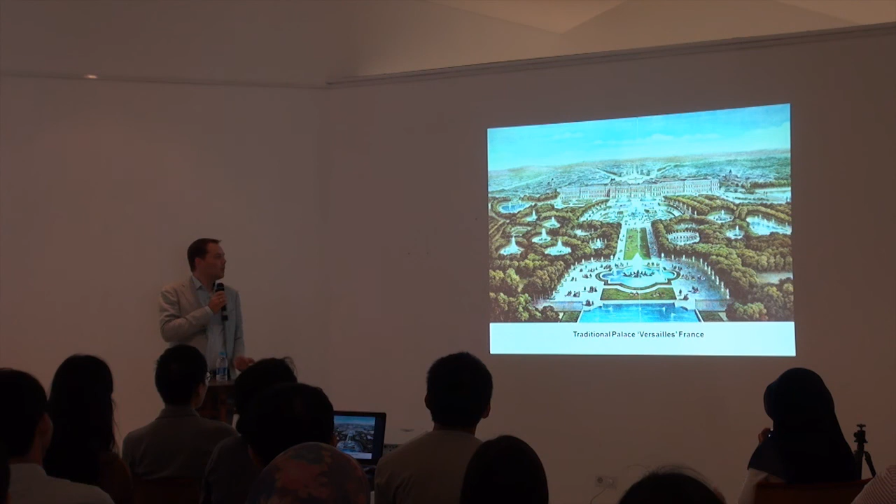This is a very typical way of representing horizontal building by a palace, which always was a very stretched building, and therefore became more or less an icon of the monarchy or of the king, and has a lot of stature.

But also within Indonesia, your traditional houses in Java were also always very horizontal. Functionality was next to each other instead of stacked. And even until the early 1900s, we were still talking about typologies that were mainly oriented horizontally, like Frank Lloyd Wright's prairie houses that you probably all know. There was no pressure on this typology of buildings simply because there was space enough.

When verticality became an issue was when space became scarce, and how do you deal with that scarceness? That's also a question now that Jakarta is facing. You were able to stretch yourself for a very long time, but that's over now. You're stuck in the areas surrounding you, and now you need to think about how to make a city that is much more vertical compared to horizontal. So from horizontality, you're talking about verticality.

A dream of a lot of people started with the Tower of Babel going up to heaven. But there are many reasons why people always liked to be challenged to look upwards or vertical.

But it only became possible to really think about it with the invention of the elevator, an elevator that could bring people to real heights. That was only done in 1852 by a guy called Otis, still one of the most famous elevator brands. This is a real key moment, because from this moment on, people could really start thinking about verticality in a totally different way, because transport was not only in the horizontal plane anymore, but became vertical.

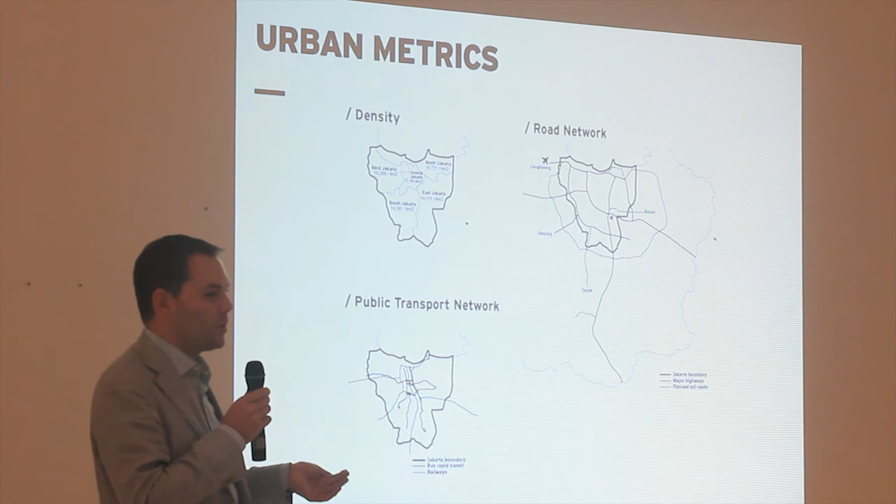Also your transport network is important to consider for vertical development. I don't tell you a secret that most people in the world think that the transport system in Jakarta is a nightmare - it's one of the most congested cities in the world. Because of that you could think about concentration, but you could also think about vertical planning as a starting point for developing new transport systems between vertical points in the city.

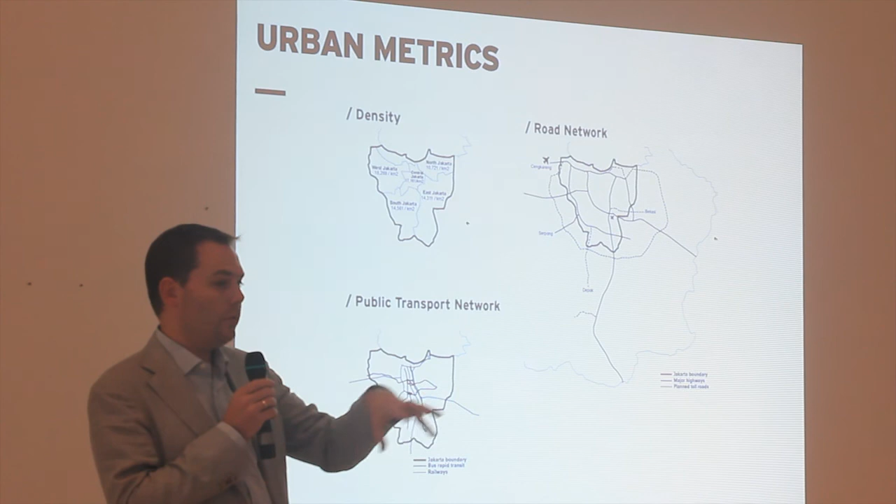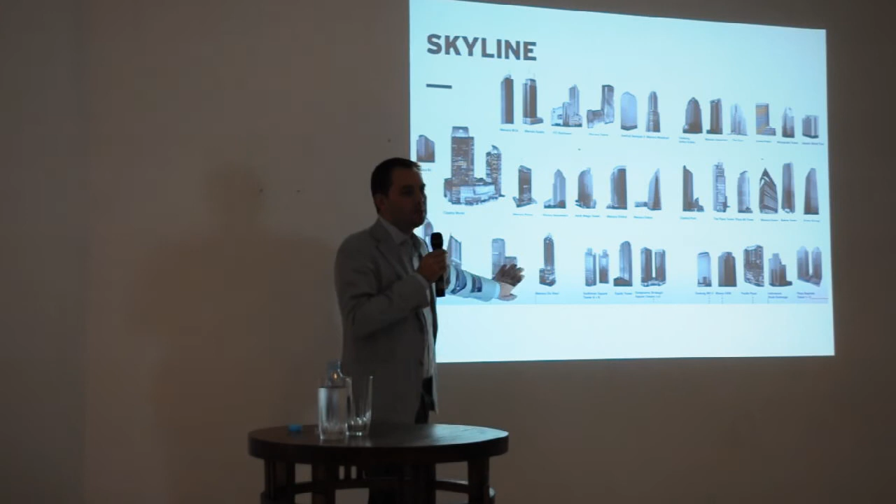This is what is currently happening in your skyline - or you could question, is this a skyline? Because it seems to be very unified, very similar. How do you deal with that similarity, and how can verticality add a dimension of differentiation? Currently it's maybe not the case. It would be interesting to think about that as well.

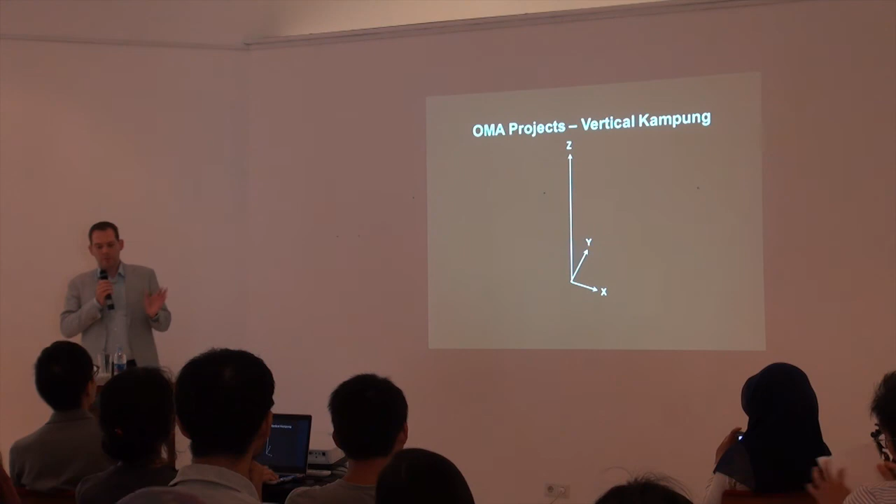So this is kind of the introduction to sketch a little bit the topic and to give a little bit of my perspective on it for the masterclass. Then I will show you some of our work, and then I will come back in the end with some of our work in Indonesia to illustrate how we work ourselves with that context a little bit.

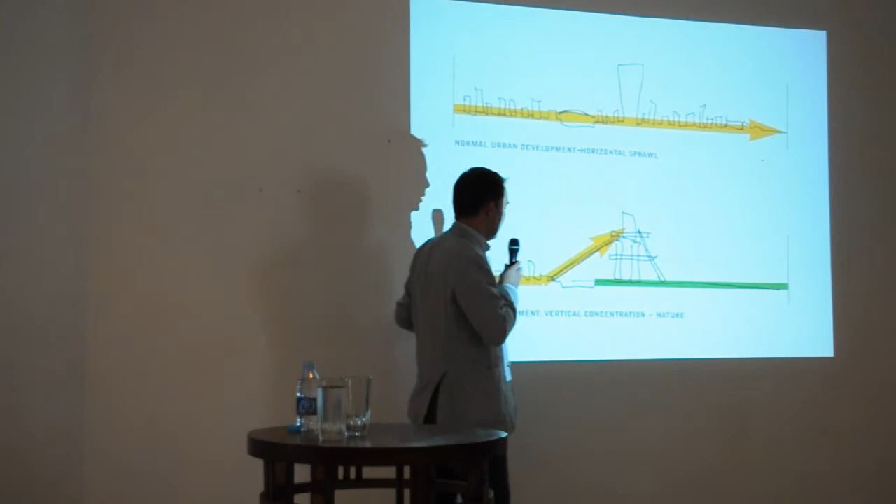The idea was to not develop horizontal sprawl, but to bring the horizontal sprawl up to liberate the ground plane for green space and to create a city at height, a very concentrated city.

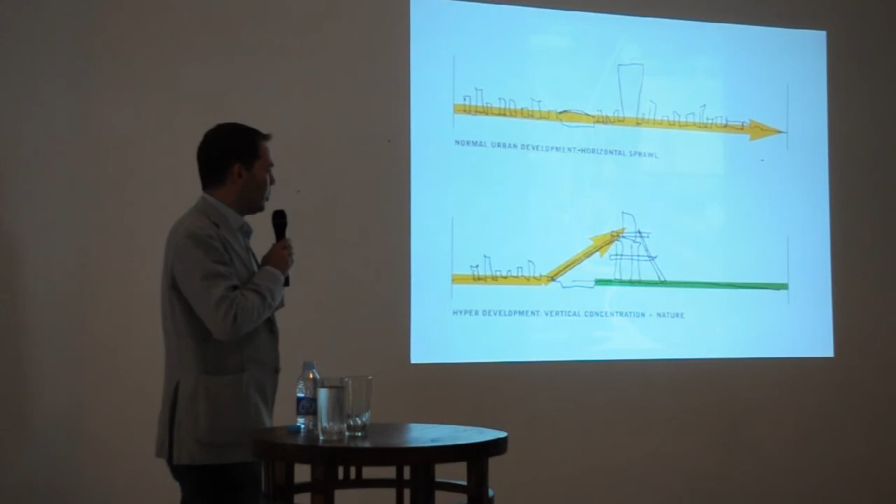Why Bangkok? Bangkok is a city that has a lot of problems in its transport system, but also has almost no public green or any ground plane that can be used by the people of the city anymore.

Which meant that we could liberate space. Normally these 120,000 people would use this ground plane. If we go for a structure like this, it would only take that square footprint, and that meant the rest could be public space or nature.

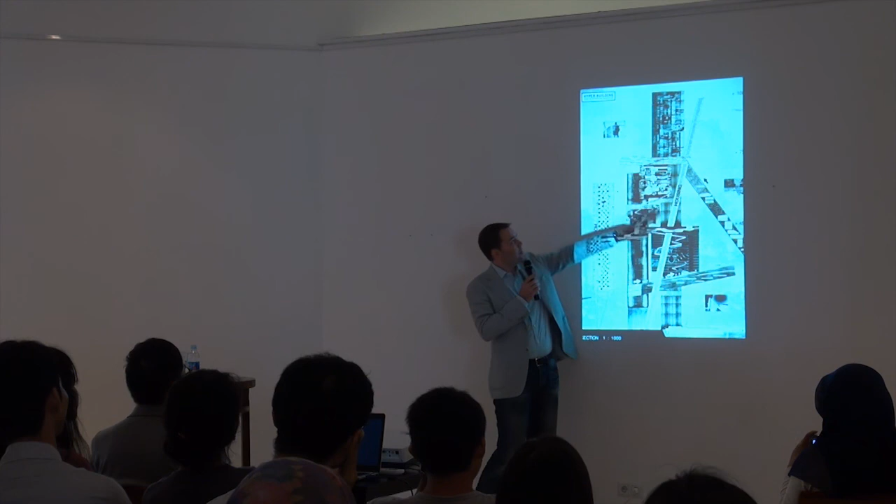These were the hand drawings made, where you see housing implemented also as streets, as vertical transport nodes, and all the cultural, media, universities, and shopping integrated in a vertical dimension. Here you see there was a main route that people could take through it.

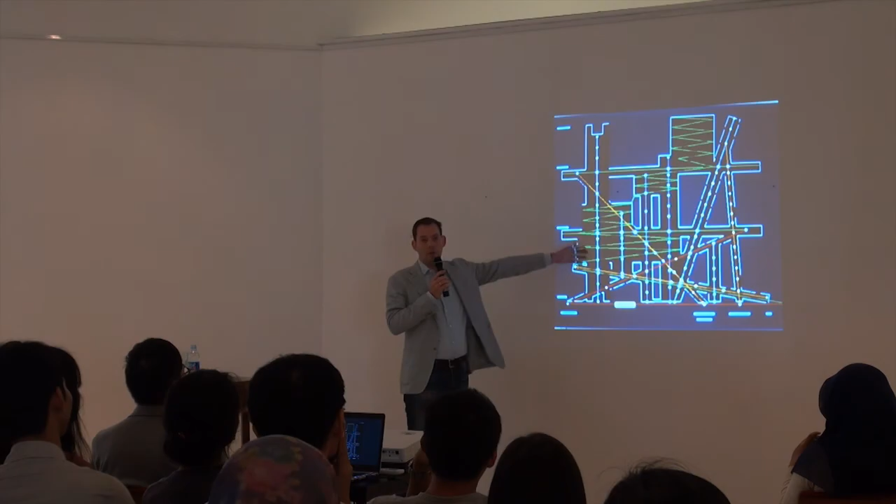All the connections were in different dimensions and different directions. Here you see that elements we know as mainly horizontal in this project were projected as vertical. So simply a street became a vertical element of transport, and the houses were still connected to it as if it was in the flat plane.

Of course, the people in Bangkok thought that OMA became totally crazy. How could you propose something like this? Because of course that doesn't really work. So it became a theoretical model to start a conversation on vertical planning in cities.

Similar proposals we did later on in Shanghai and in New York, based on the same project and the same system, just to provoke a dialogue about vertical planning. It's not just an extrusion tower, but it can be much more. It's a social aspect, a social planning of a part of a city.

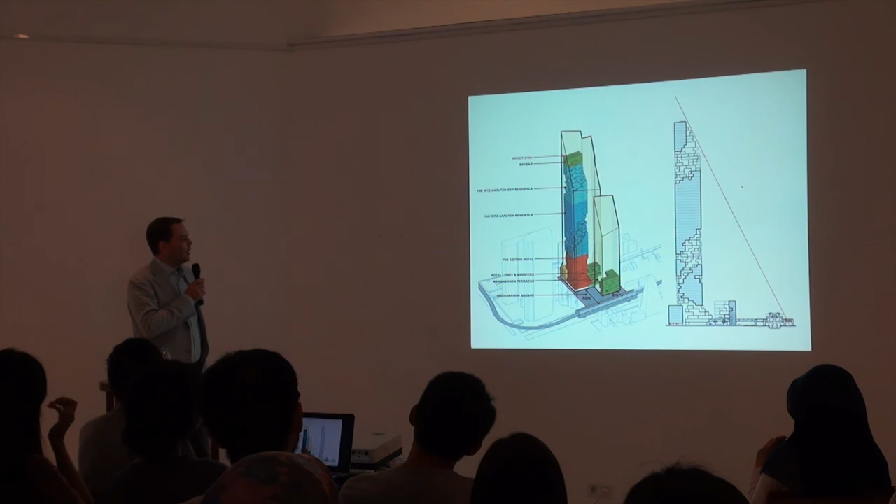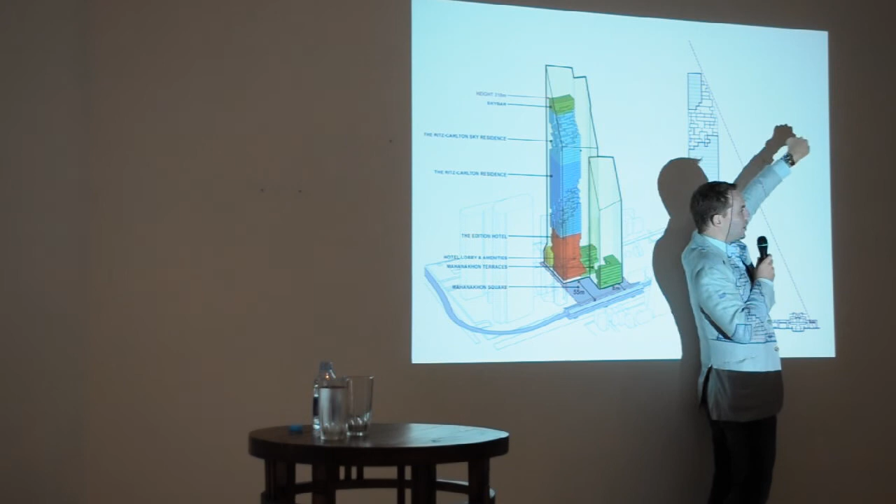They asked us to do retail, hotel, apartments, and then on the top, luxury apartments. What we did, we simply took the envelope we were given, and at the top it is cut off because of the planes that land at the airport and come through here, so you cannot surpass that line. We just cut it off, and then used the program bar we received simply as the planning.

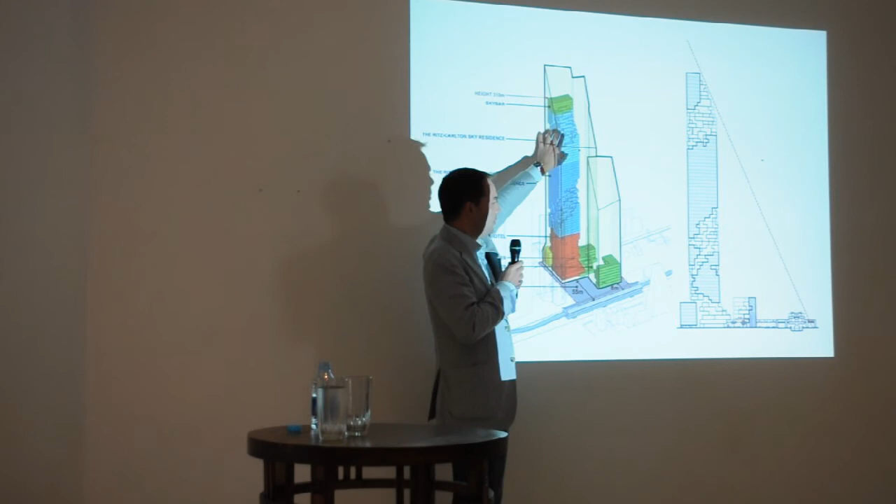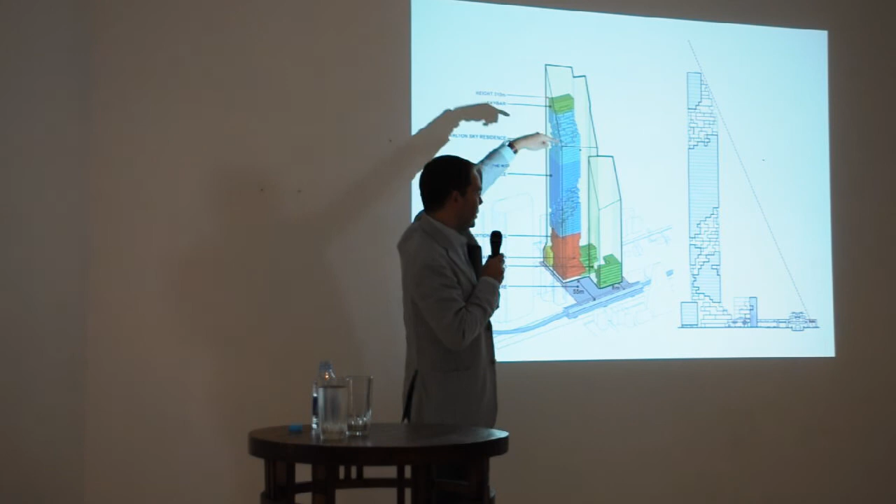So you really have the retail, really have the hotel, really have the apartments, really have the sky apartments. And because for us, everybody that uses this building is individual, we started carving out a spiral so that every floor plate becomes unique and different, and every element of the tower becomes unique and different. You see here how it works.

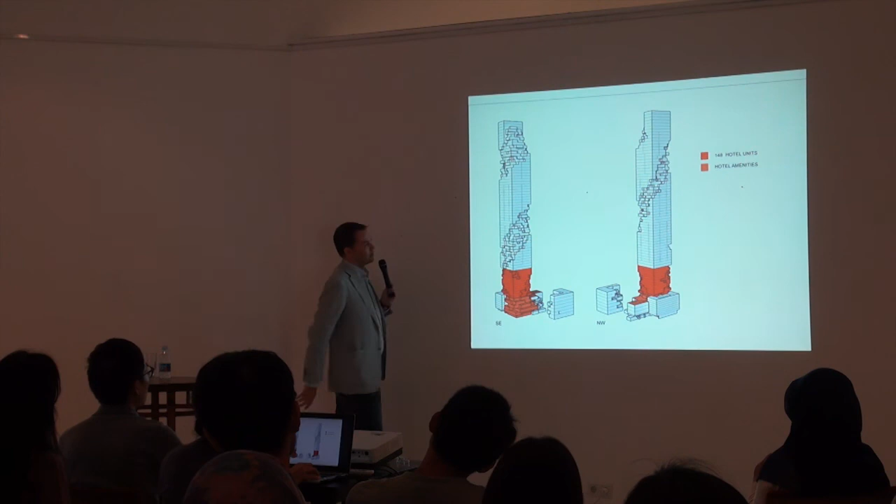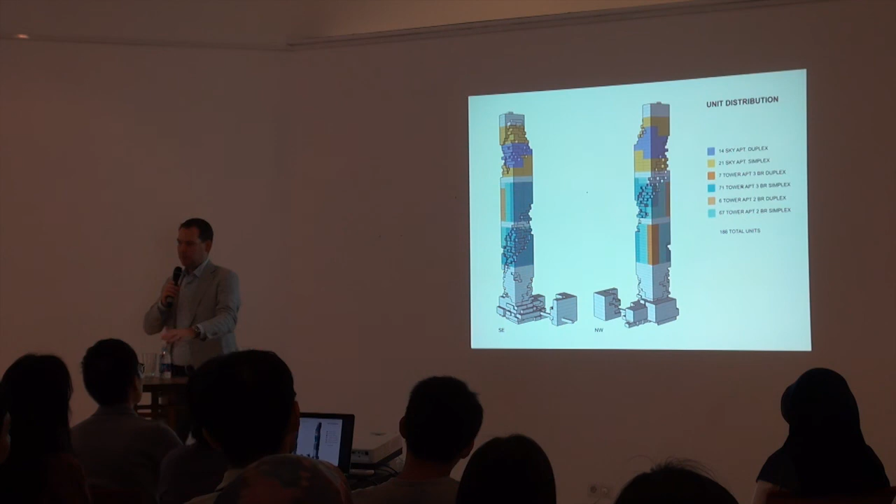This spiral just continues over the tower to make every place different over the planning. Here the hotel units, and here all the housing apartments that have outdoor spaces in different places—single apartments, duplex apartments, and triple apartments.

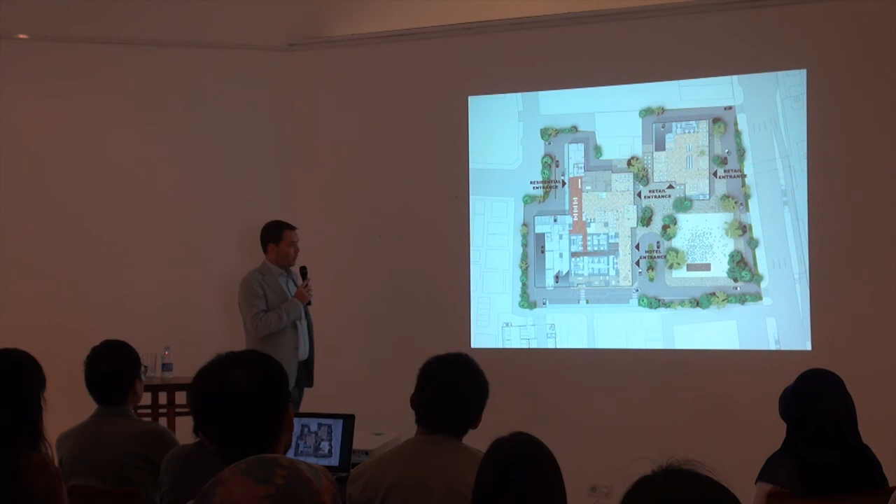Next one. And then here you see how it looks from below, from the retail area, and coming up, and you see that all the houses have their own individual way of expressing themselves, going to the top. This is in one of the apartments.

Because we go so high, the windows cannot open anymore in a normal situation because of the air pressure, so the windows simply open up to the top. And here you see an image of the building, how it will be when it's finished.

Then a project that we are building currently, and I will also show you pictures of how the situation is simply in our own city, in Rotterdam in the Netherlands. The building is also called the Rotterdam, so it resembles the city, and it is really a vertical city as well. It's right in the heart of the city, on one of the most prominent islands.

Of course, Rotterdam is known for its harbor activity, so there's a lot of water. And this is the picture of the site when we were asked to design it. This is Hotel New York.

That's a very famous place in the Netherlands because that's where all the big ocean liners would start their journey to America. So people that went to the promised land from Europe got on the ocean liner through Hotel New York and then went on their way to New York. It's now a monument, it's really a hotel now.

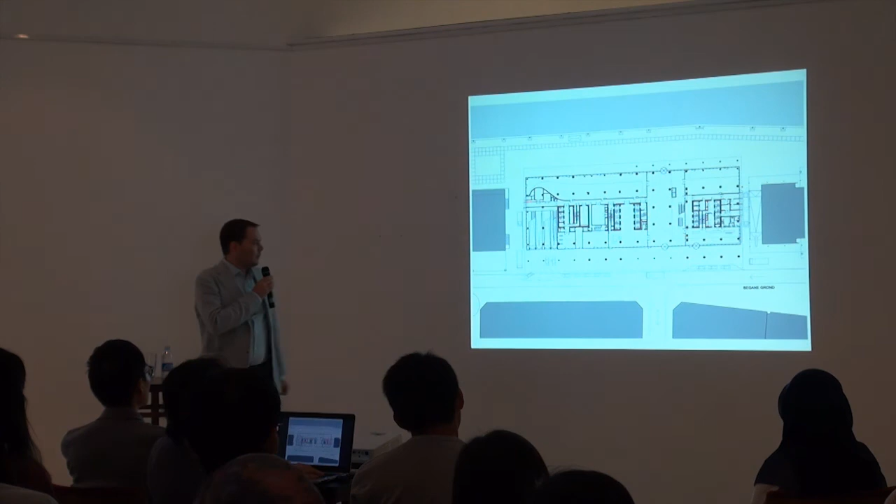And here you see at ground layout, again, different emphasis for the different functionalities. And then coming up, still united with their cores. And then they start differentiating themselves, creating the views from the apartments, creating the views from the offices in the vertical dimension. And then on the top, separated.

This was the submission for the competition. Here a render of the situation. And here the night render that we submitted at the competition moment.

And these are pictures I took two weeks ago. We were there for a partner meeting. And you see now how the building is coming up. So this is one of the old industrial buildings, and the building is now towering above it.

Inside of the units, you see always sea and water. And here you see the outside of the building with the different boxes shifted in such a way to create that vertical dimension. And this is on the top floor, the view over the Maas. And this is from below, where you see the differentiation of functionality also expressed in the volume.

Then maybe the most literal example that OMA ever did about vertical planning of a city is the Renaissance in Dubai.

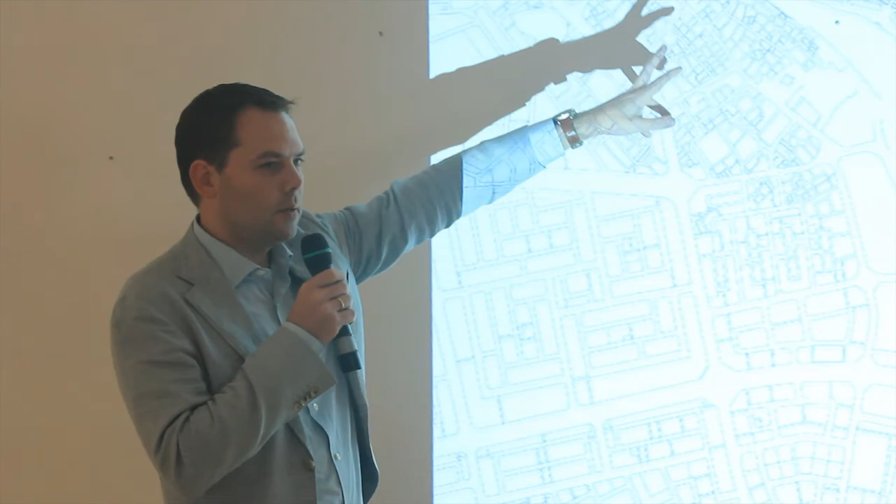What they were planning to do was demolish the old city of Dubai, which was a beautiful old Kasbah typology of city, and replace it with all kinds of towers. Luckily, they made this a preservation area, so that didn't happen. So we proposed to simply take a piece of that old city, which is horizontal, and make it vertical.

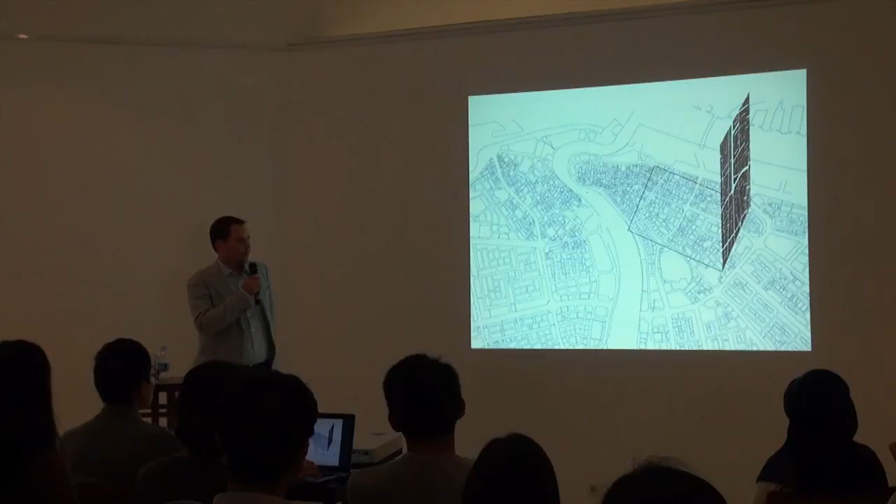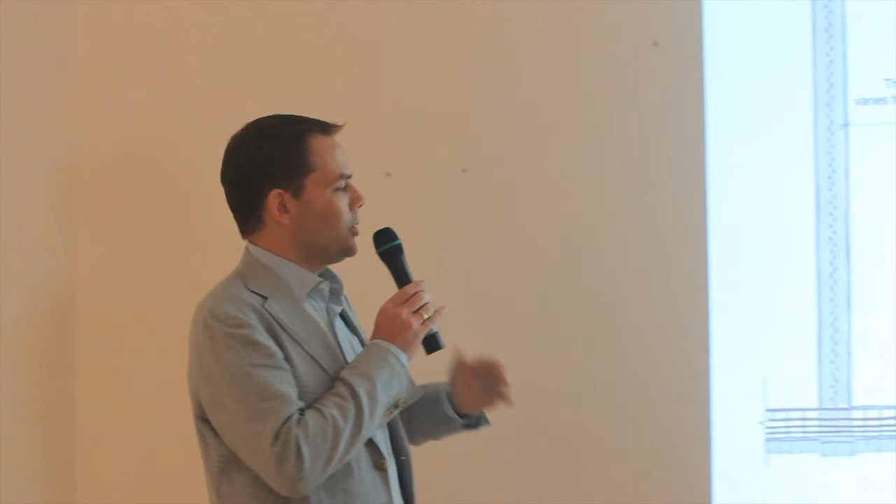So this was the section of the horizontal city, and then this was the vertical planning of it, simply using the exact same spaces, the streets in between, the streets in the vertical dimension, and then the blocks with the different functionalities. And then this was the architecture put to it, which was very generic, and at the same time a few special moments where the cultural functions were in the slab. We also worked this dream out so that the structure was defined and possible.

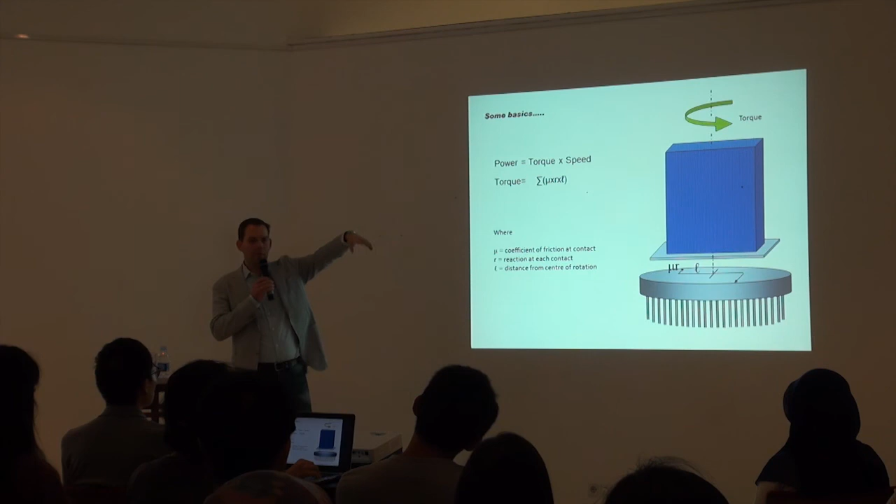We also thought it might be interesting to see if we could put this slab in the ground in such a way that it could rotate 24 hours around its own axis, so that the view from every angle of the city would change within 24 hours. So this was the idea - all these towers that they had planned, and we said, don't plan more office towers, keep a piece of the city as a central focal point, and build it as a very generic slab. And then it could turn in 24 hours around its axis.

And then this would be the end image that we presented as the vertical city in Dubai. We also had a dream that whenever Earth was not existing anymore, and people or whatever other creatures came back to Earth to discover what we did before, they would find that thing as a preservation.

And can you go back one?

What's very important to say is that this was a dream, of course, but we were very close to realizing it, because the plan was in the end selected, and we planned it out all the way to detailed design, and then the crash in Dubai happened. The only thing that didn't survive was the turning, but the whole project itself was really detailed down to detailed design, so it was almost starting construction. We still hope that Dubai revives and that maybe this building can still come back.

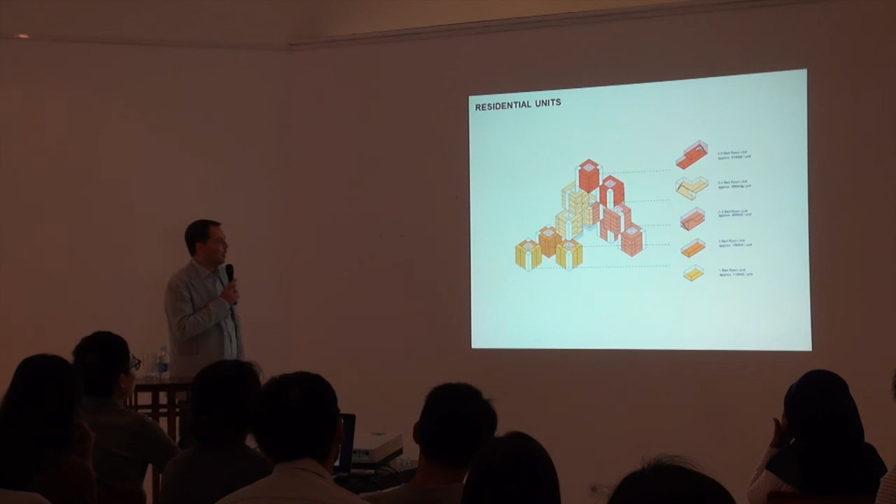And here some of the residential units - we're talking about the Kampung residential program. Here you could see that we organized the cores in the corners in such a way that it would stack up and become one unity.

Here you see all the different typologies of residential units, and all the different types of connections between these units. And again, a picture of the model.

That project was in the end not selected, but it led to this: Gillman Heights project in Singapore, which is now almost finished. Probably some of you that visit Singapore from Jakarta have seen it come up.

It's in a very important site location within Singapore. But the discussion was how can we make a scheme that also incorporates nature in such a very dense city as Singapore. Also, how could we make a community and not just a building with individuals? And also, how could we learn from some space experience in nature within our building?

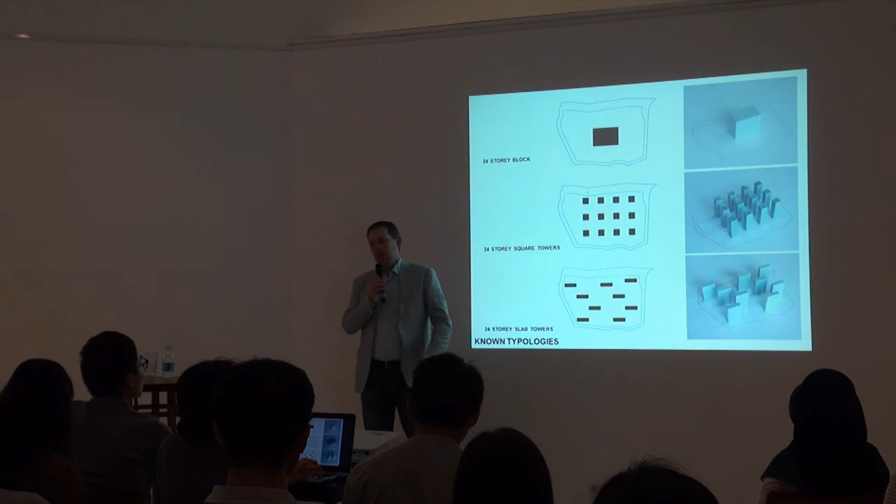The site is 81,000 square meters. We have an FAR of 2.1, so we can build about 170,000 square meters on that site. The typical response would be you make one big building, or smaller towers, or smaller slabs. But all of that is quite problematic because of the interference. So what can we learn, also in a large project, from a village?

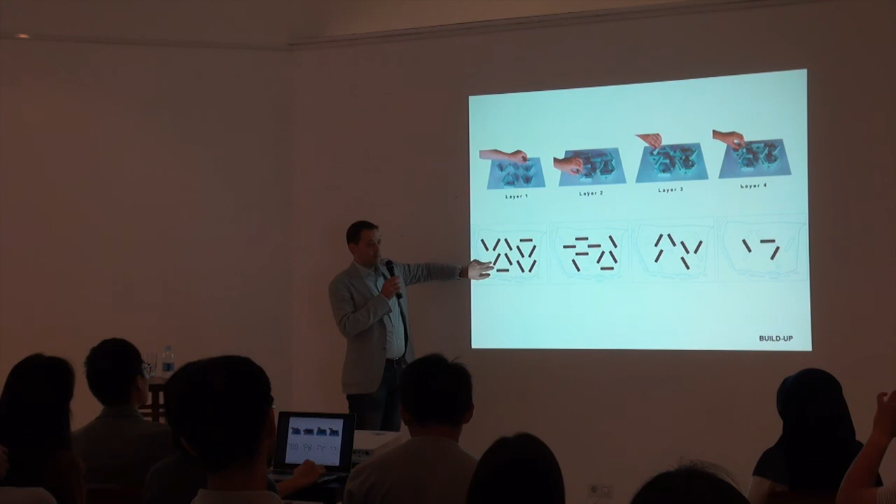And then we started to create different layers in a vertical situation. First, more dense, and all these areas have a direct relationship with the ground, so their main relationship is close by - views further away are less important. Then coming up in lower density, so in the end the highest layer of blocks has the lowest density and has mainly the view out.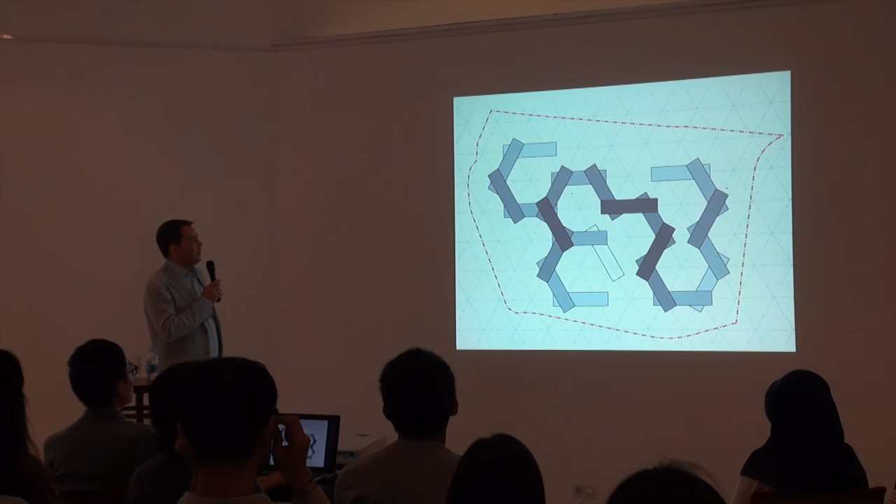And then we created a grid of these blocks that always overlapped at 2 points, and that's exactly always the point where the core is. So this core, which sometimes connects to the top layer, can actually serve 4 blocks on 4 different layers of the project, and therefore it became very efficient for vertical transport.

And then this is the stack of the blocks that you have, all with communities within that are planned in a different way. And then here a closer look.

And here the image that we submitted at the time of the competition, with a very generic facade, but a lot of views over, a lot of parks at height, and the blocks all directed in such a way that they always had a clear view out.

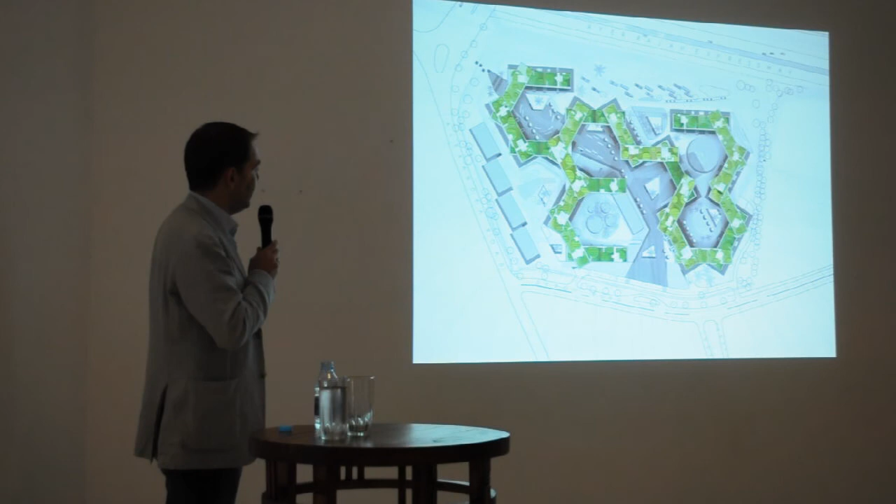And here the image of the roofscape and the communityscape. And here an image from close by on how these apartments would work. Here a view out from the balconies, and here a flat facade.

I unfortunately cannot show you images of the building project at this moment of time, because the developer wants to launch this project to the worldwide press with one group of pictures when they are ready to do so. So by contract I cannot show you anything else than drawings.

But the building is now fully at height. The facades are close to up the 3rd layer, and they are now finalizing the facades of the 4th layer. The interior of the 1st and 2nd layer is finished, and the first inhabitants should move in November of this year.

Then maybe the most extreme version of a vertical city that OMA ever planned - it was for Mumbai, the city of Mumbai in India, where we didn't only explore vertical functionality, but also vertical public space, and even the biggest square of India to be at height, at almost 300 meters up in the air.

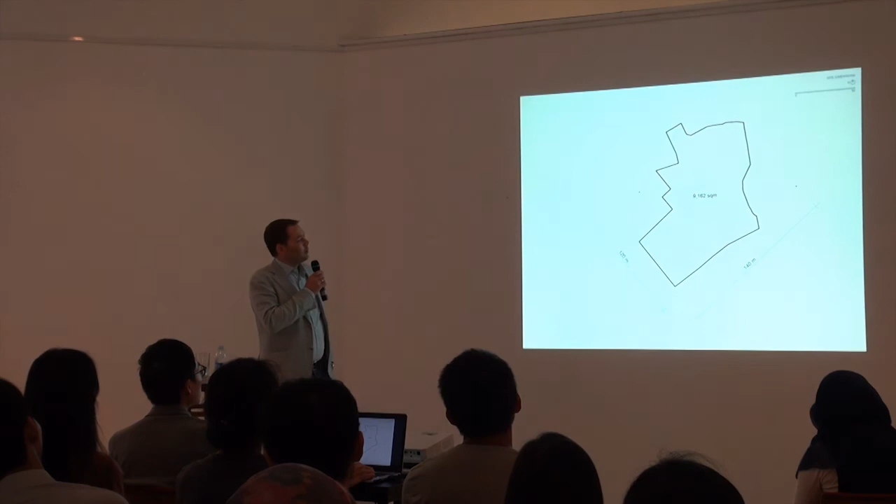This is Mumbai as it is today, with some very historical buildings like the Victorian Palace, and some very quick vertical buildings coming up because of the pressure on the city. The India Tower that we were supposed to plan was right in the heart of the city - a very tiny site, really very small, only 9,000 square meters.

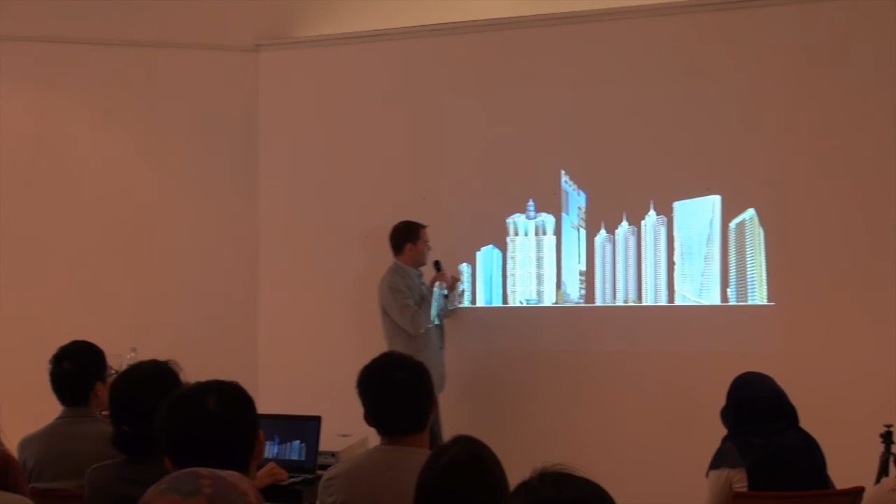We were asked to do 3 towers on this existing 9,000 square meter site. So the question was, can you please do 3 towers on it? And this is the program: luxury apartments, lease apartments, guest apartments, food and beverage, retail, hotel, parking—really a city.

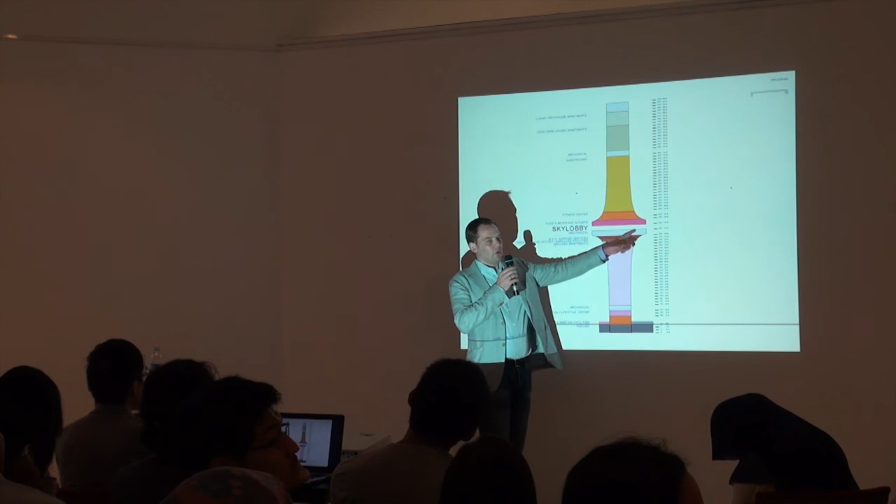We said, let's do it not in 3 towers, let's do just one very, very tall one, and create a place in the city which is a Sky Lobby—simply a plaza at height. We created a site mainly dominated by housing, and a top side with the other functionalities. Because of that, we created much more space surrounding the tower and much more public space below. And then this was the image that we submitted.

We won this competition. Unfortunately, the developer that was going to build this building wasn't playing by the rules and ended up in jail. So the building is never going to be built, to our great frustration.

All the floor plans of the building, so from very small coming up to the center where it became the plaza, and then going back to very small at the top again.

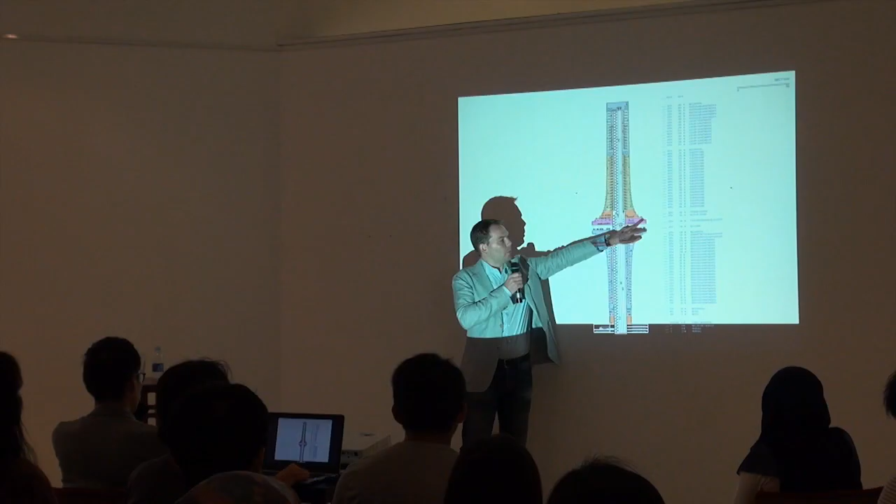And this was then the vertical organization: lifts going up in the same shaft because they would transfer, then the public functionalities with retail, the plaza, and all the F&B facilities around the heart, all the housing at the bottom, and the hotel and top housing at the top. Here you see how that would look if you were at street level.

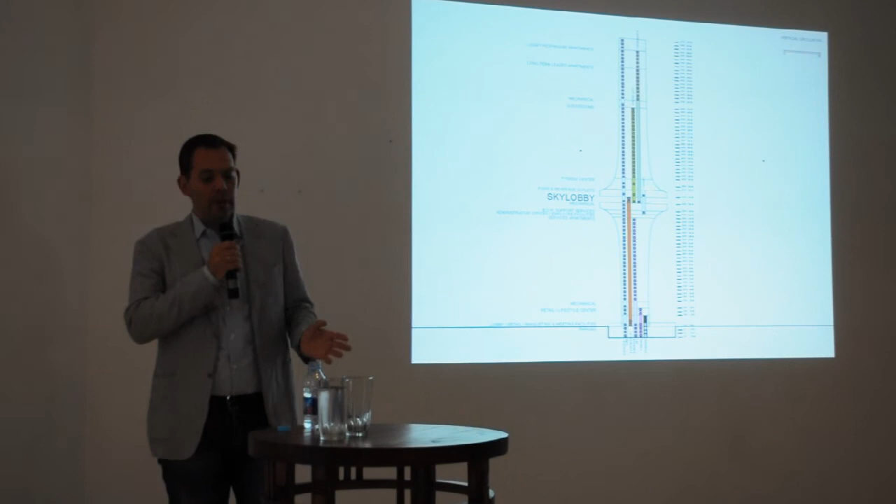The vertical transportation is of course extremely important to pay a lot of attention to. When you would arrive, the footprint would really be very small.

And then you have the lobby with retail and then all the apartments. The apartments would all be very much the same—you had the central core and then apartments in different sizes, but always with the view out and no connection to the neighbor, so you would never look into the next building. And this would then be the view over Mumbai from your apartment.

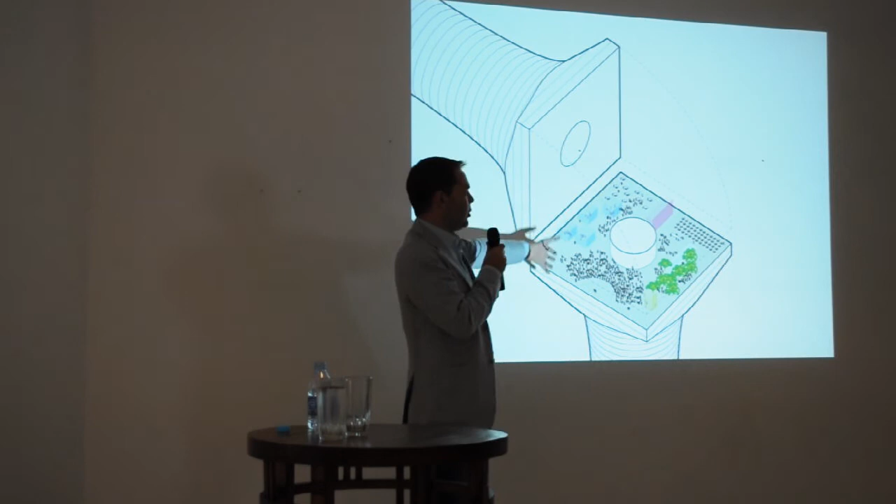Then the center area, as I already said, an open plaza at height with all the retail and F&B facilities surrounding it—almost like a public square inside the building. And here a view when you approach it.

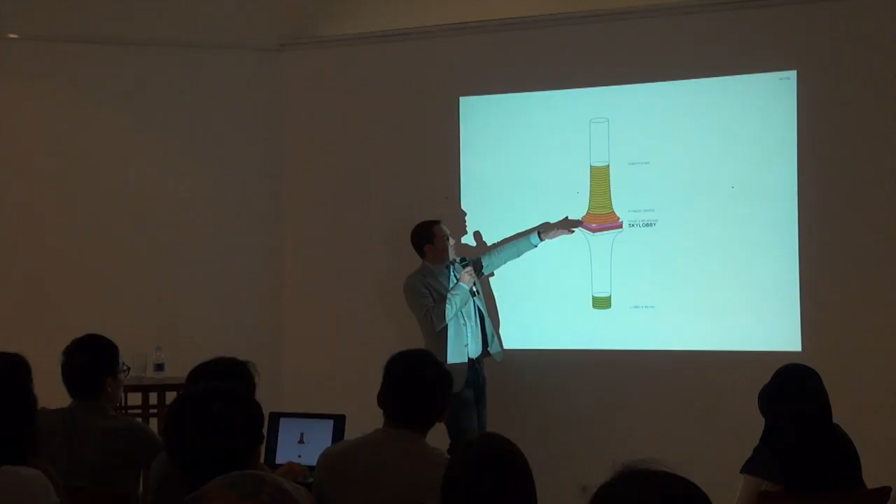And then above it, the supporting functionalities and the hotel. The hotel had standard suites, the small rooms, and then, of course, the larger suites, again overlooking the city. And then at the top, the luxury apartments and the penthouses, which could sometimes take even a full floor.

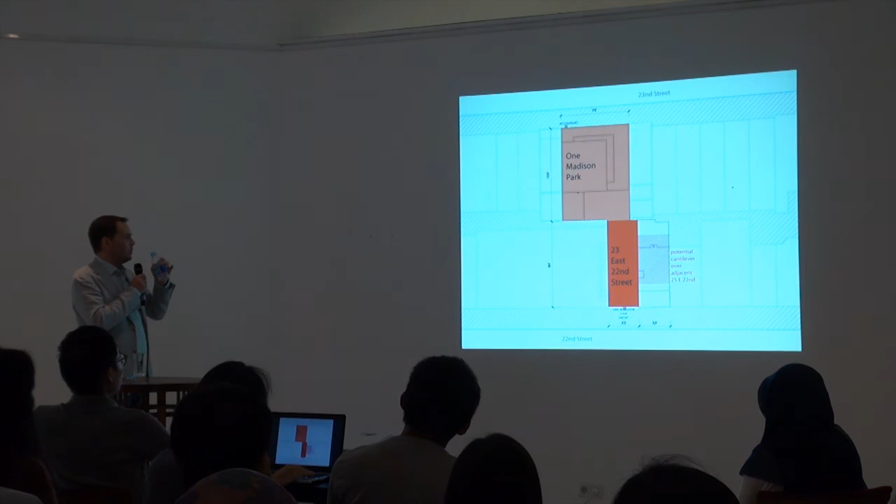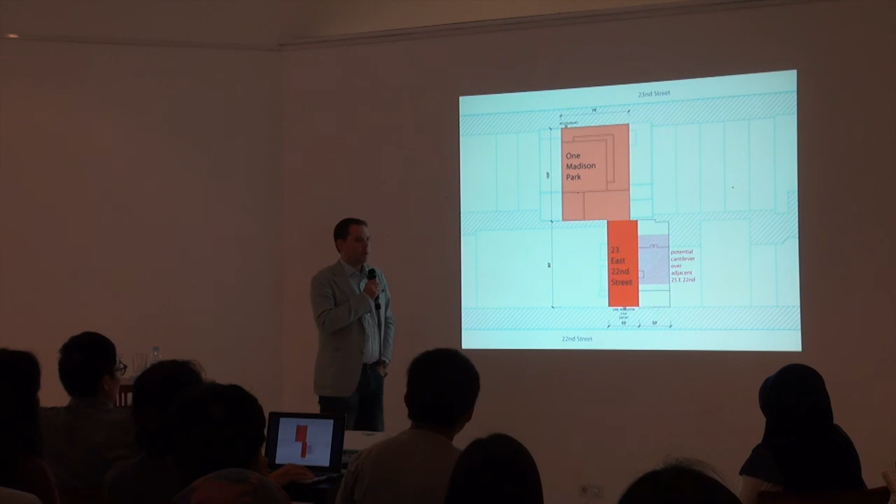Then a project in New York, 22nd Street. A project that started building already, but then through the economic crisis in the United States got stopped. We still hope that when it goes up, it comes back. It is a very small site.

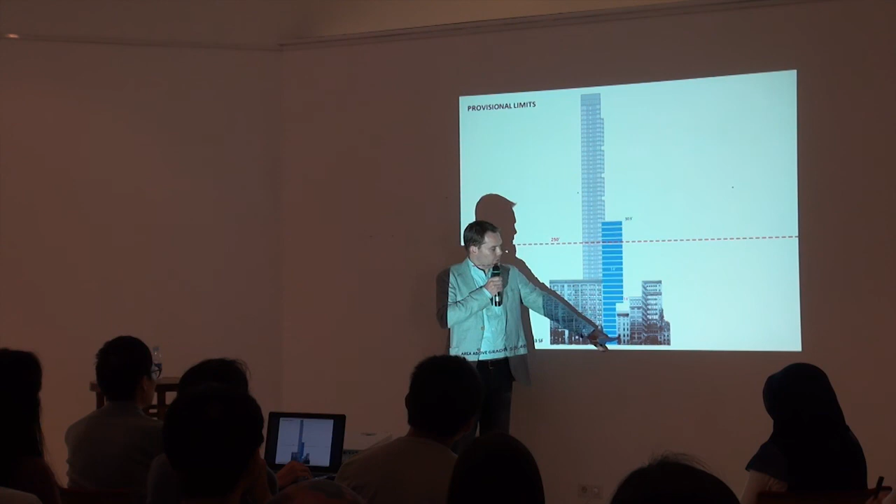Next one: in between 2 buildings, only 33 feet wide. We could go above the historical building, gain air rights, and build above it. It would have the Madison Tower in its full view, but because this is Madison Park, which is extremely important, we wanted to create good views to that park, also from our tower, although it was blocked by this one.

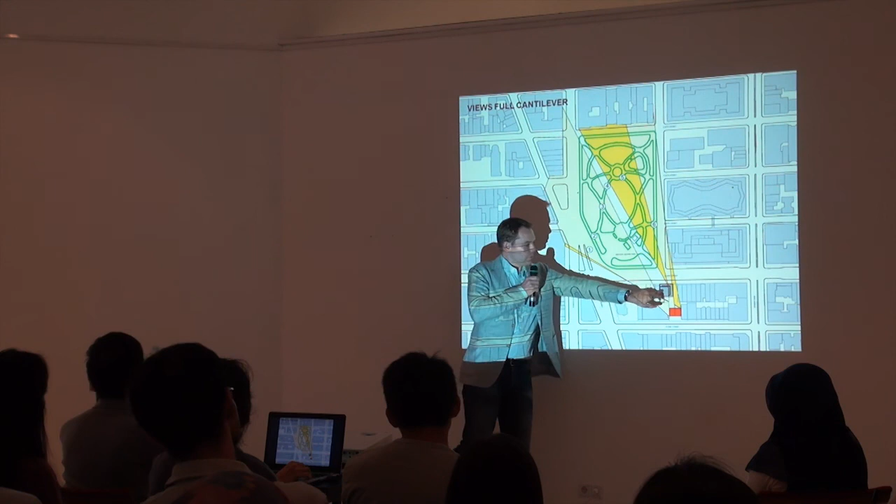So the first apartments were very long and not with a lot of width, and then the apartments coming up became wider and less deep, and then in the end, they were in their full width.

And then again, a project. This was already on sale, the sales units was built, and then this happened. So unfortunately, we predicted with our own building the failure of it. And we still hope from a different angle that at a certain moment this happens again and the building will be realized.

Another example in New York, but then opposite, not on Manhattan, but with a strong connection to Manhattan. Here on 111 Street, where the connection with Manhattan and the different important projects that are currently realized is clear. The site is a full block.

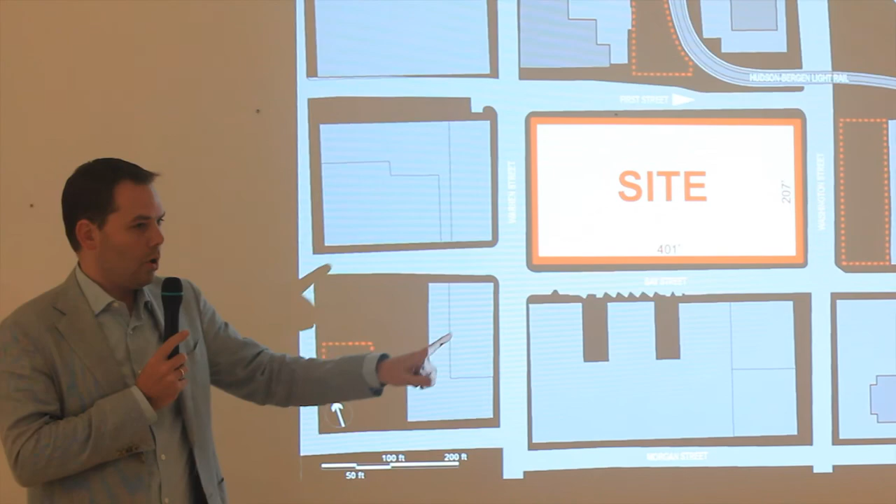This was the master plan that we received, what we should do. Then this was the program of that: retail lobbies, gallery, parking, artist studios, hotel, and apartments.

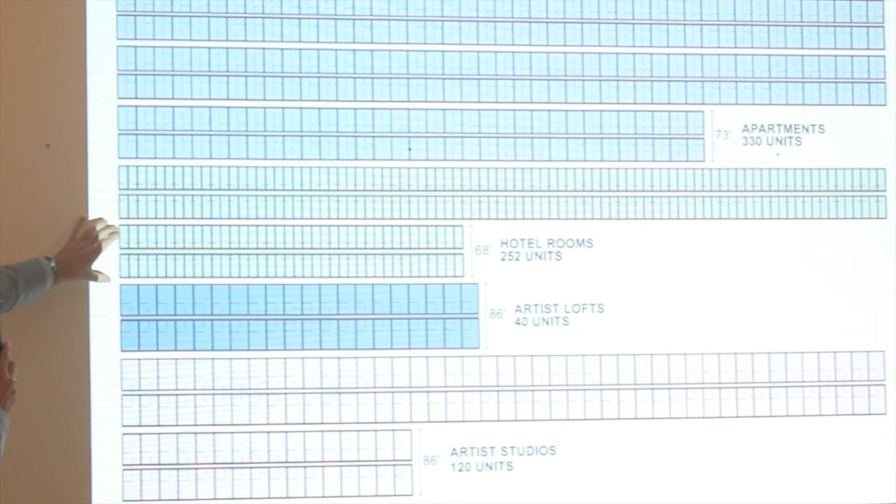And again, we started with a very mathematical approach. We started laying out these different spaces and their requirements. We actually figured out that all would fit in 73, 68, and 86 feet.

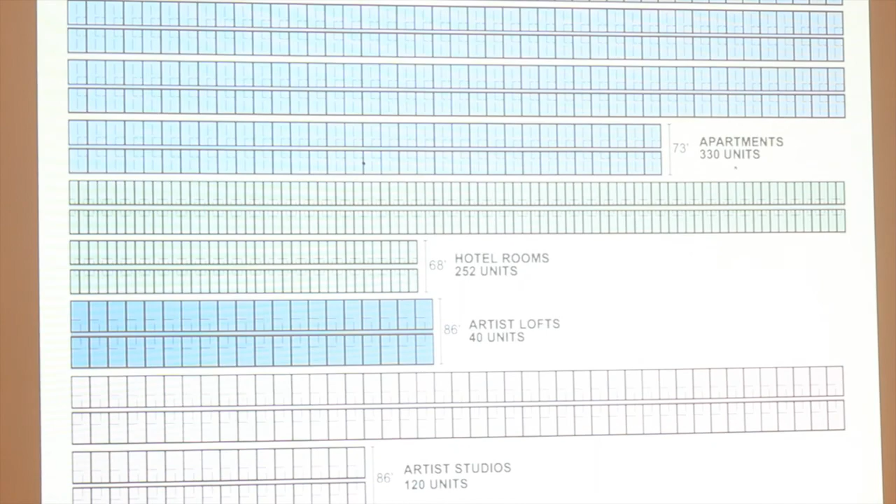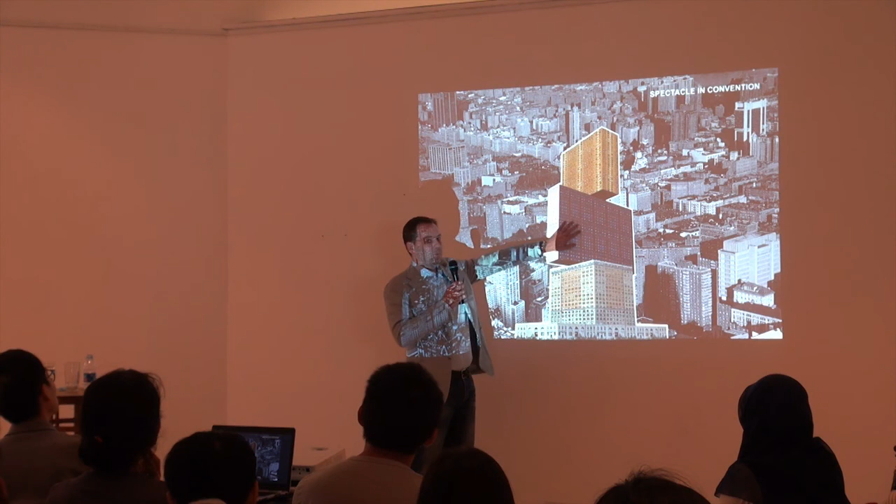And then we started laying out these different elements through these different dimensions into different blocks, and we just put these blocks on top of each other as the proposal for the vertical city. So you would be able to have a city at grade, which would just address the street, then an element that would be for public use, then an element which would be for paid use, and then an element that was used for private use. You would buy your apartment.

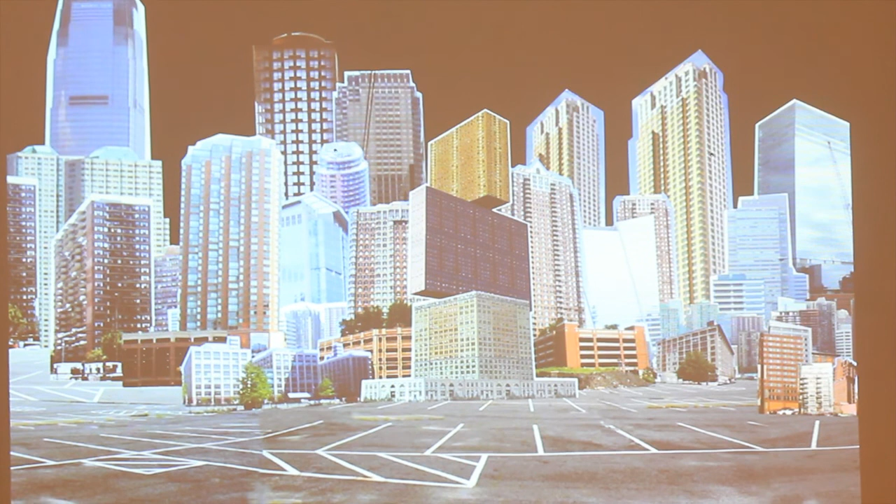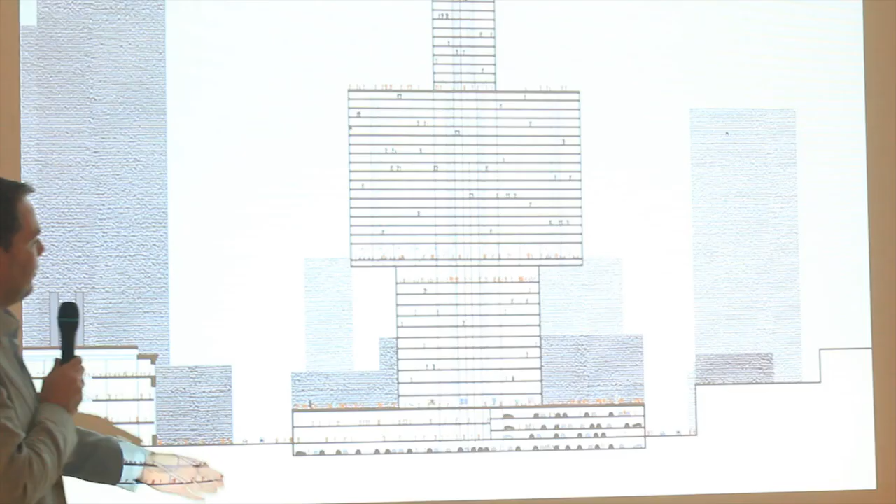And here you see how that would fit in within the rest of the skyline of New York. And this was then the functional section over the tower. Real vertical planning in every dimension, but also a horizontal planning in the other. This is the model, and here an image that was presented.

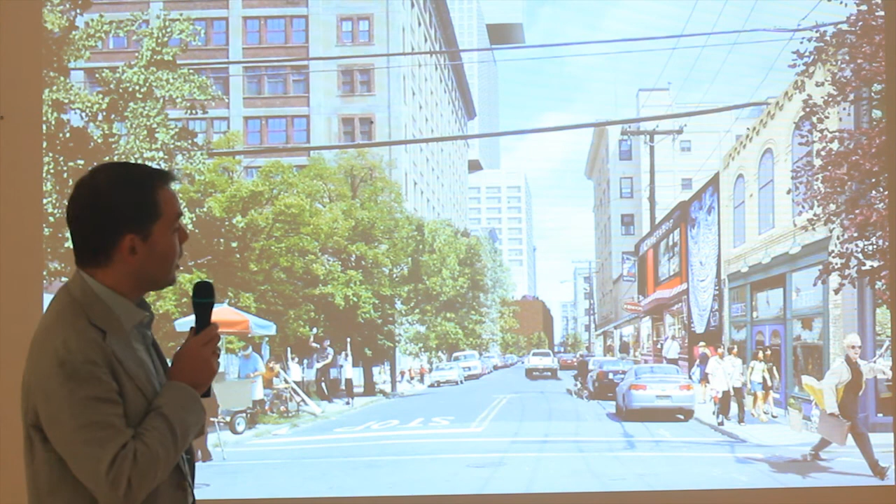So that building would be simply here between all the vertical lines. And we had hoped that it would become kind of a beacon that is totally different than the other shapes. Also, when you approach it, it becomes much more prominent at base, but then the top becomes a kind of a sky, very unstable. And then when you're almost there, you almost don't notice it anymore. And when you're below it, you only will notice its plinth and not the building itself.

That building is also on hold at this moment of time. So then another Asian proposal, a proposal that we did just 2 years ago for a project on the Bund in Shanghai. Shanghai is a very strange city. It has a very vertical history, it has an extreme horizontal history, an extreme vertical expression currently in its CBD, and we were asked to plan something that is a little bit in between.

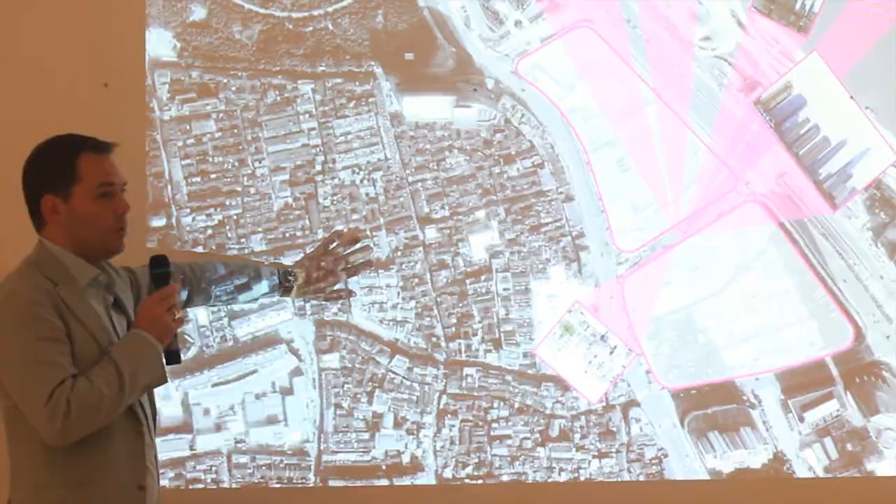But it is also something that is on the Bund, which is the river, most important. Then on the other side is the CBD area, and here is the old city, which is an historic old city with tiny, tiny houses, sometimes 1 or 2 layers only. So how do you address that scale difference in an almost square kilometer between like the tiniest house and the most vertical building you could imagine in Asia?

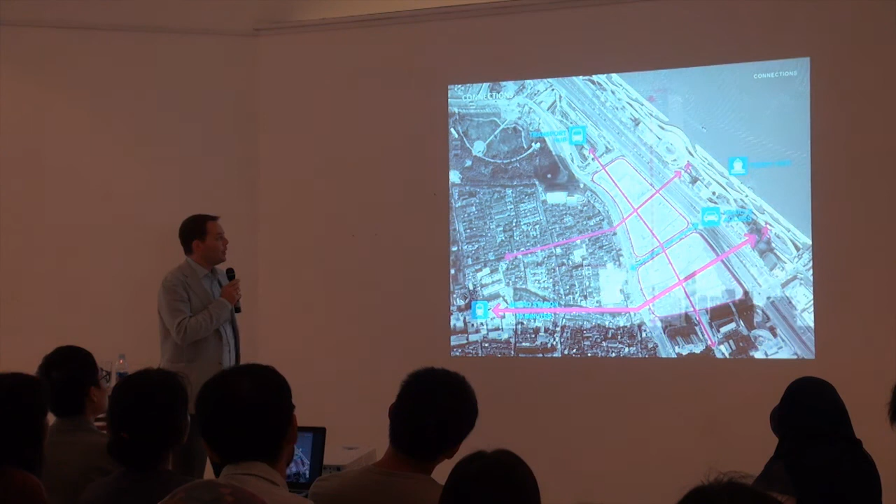Firstly, we looked at the connections that we need to keep to not cut off the original city from the Bund itself, because that relationship is of course historic and important. And then we looked at how can we address that extreme scale difference of 10 meters of the historical city and 632 meters of the CBD. And we only could be in between.

So what we tried to do is make a proposal that had all the different scales and answered to the large scale and the small scale, almost like how they get stone out of a mine. And so we proposed elements that are addressing the height of the proposal, elements addressing the ground, and also this was done on purpose.

Because from a very large distance it looked as if it addressed the vertical moments in the city and the distance between them, but from close by it created the possibility to have the connection with the Bund for the city still and the full view to the skyline without interrupting. So more or less it framed both the small scale and the large scale, and everything in between became the mass.

And so from the old city you would still be able to look out, and from the water you would still see it as one composite block, one vertical city. It had many different elements that were all oriented in different blocks and scales.

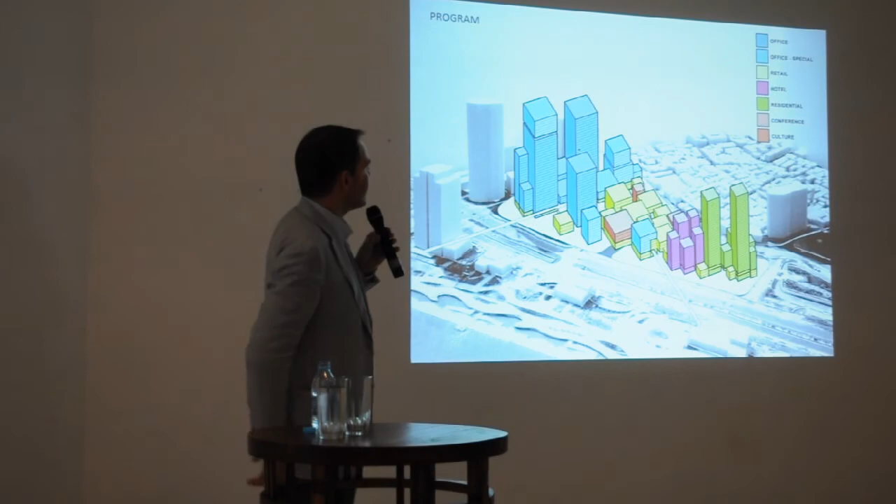That project was won, but it's not going to be built because the developer that bought that piece of land, which was the most expensive piece of land in China at that moment, didn't have the finances to pay his second payment. The government simply took back the land, saying thank you for the first payment, but now the land is ours again. So it is now going to be 6 different plots by different developers.

Now I was asked to speak a little bit about our Indonesian projects. I cannot say too much about them because we're doing 4 projects, and 3 of them are still extremely confidential.

This one is a confidential project, but it's a bit of a theoretical project happening in Bali, where we are asked to look at a resort, which is obviously a very prominent program in Bali, but also to create a place for cultural events and a platform that could be used by the people of Bali themselves. It's a very horizontal project, and I'm only going to give you a few hints of what it's going to be.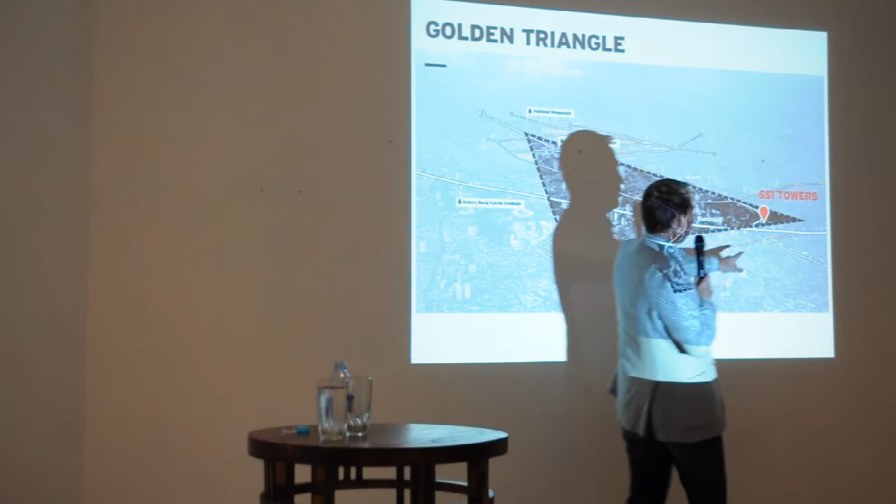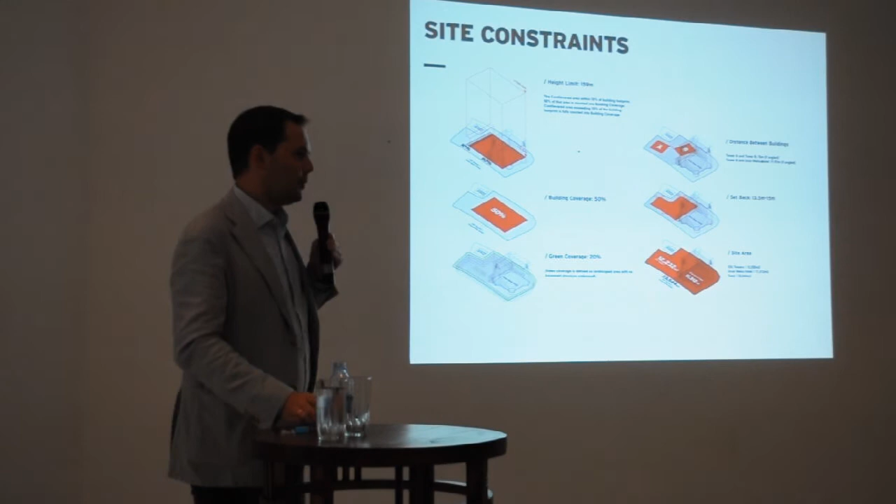So we are currently here, you all know the location because we are sitting there, right at the corner of the Golden Triangle, which is where most high buildings in Jakarta are located. The parameters of the project are a height limit of 160 meters, a building coverage of 50, a green coverage of 20, and the hotel that is there takes about half of all of that. So we have very little space left to build two quite large towers.

We made many proposals to solve it. In the end, we came to the conclusion that we need to build two office towers, one for SSI and one for somebody else, plus retail and a function hall that connects to the hotel. We simply had to overlap the different program elements to be able to fit it on the site.

So we created three different program bars: one for the hotel, one for the office tower of SSI with other hotel functions like the meeting rooms and function hall, and one full office tower with retail in it. We connected them in such a way that there is a possibility to liberate the ground plane from program, because I think in Indonesia the ground plane is a very important topic.

Not only for safety reasons, but you are not capable of entering any of the plots just by wandering around, because there is a big fence or a big barrier or even a bomb check system to allow you in or to prevent you from going in.

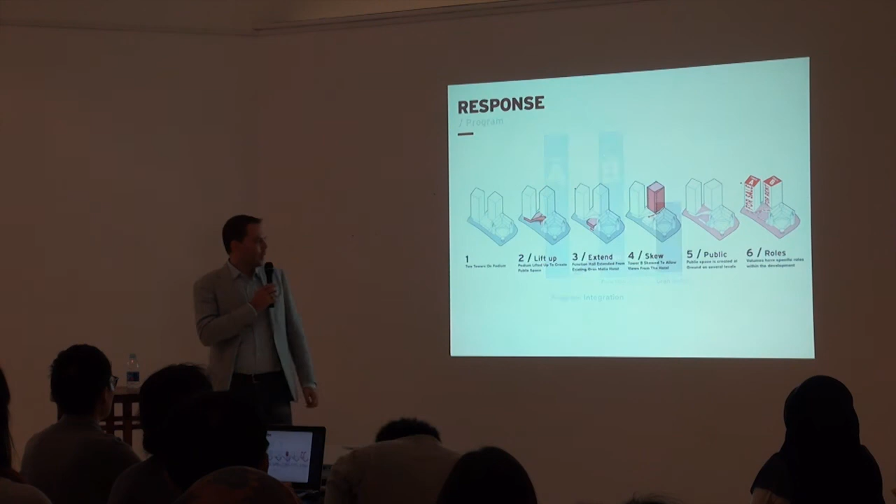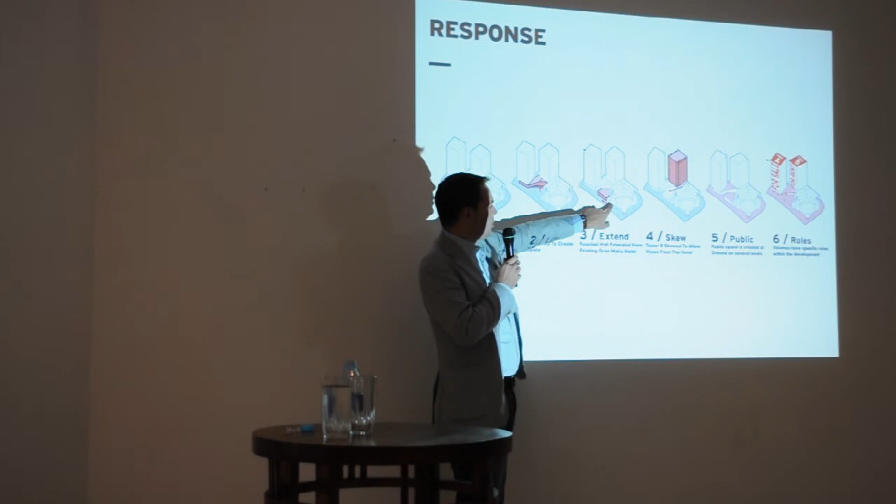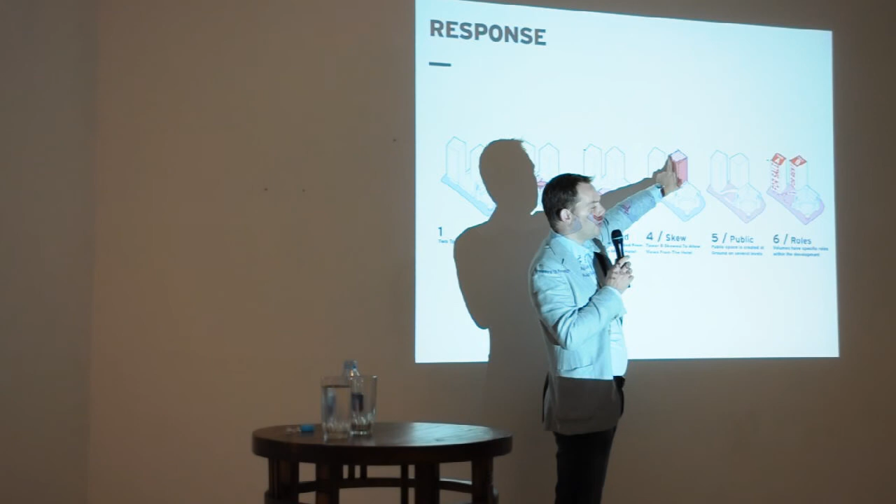This client really wants to have a public canvas at the bottom. So what we did, very simple: we took the two towers, the podium with the function hall and the retail. We lifted the retail up, stretched out the function hall from the hotel, then skewed the tower so that point versus point, the distance between the towers should not be 30 meters, but by code only 15 meters. Because of doing that, we were able to create the full program on the site.

And this was then the render that we delivered. A lot of people ask me, why did you give it these colors, why gold and why silver? The standard answer is, if you look at your skyline currently, it's a glass skyline, but because of the high sun that you have, it's also a very reflective glass skyline with only green and blue reflecting buildings. I'm not sure about you, but I don't think it's very exciting, because of that everything looks the same. There is no real difference, and none of the buildings actually stand out because they all have to use the same material, simply because of the UV protection films in them.

So here we said, let's forget about the UV films. We put other solar protection in place, namely louvers on the outside, and that form the facade, and also give the color, so golden louvers and silver louvers.

So if you build up the project: entrance of one tower, entrance of the second, the function hall directly connected to the hotel. And then the plane, the area where you could walk over the site next to the function hall, going in with the escalators into the shopping area.

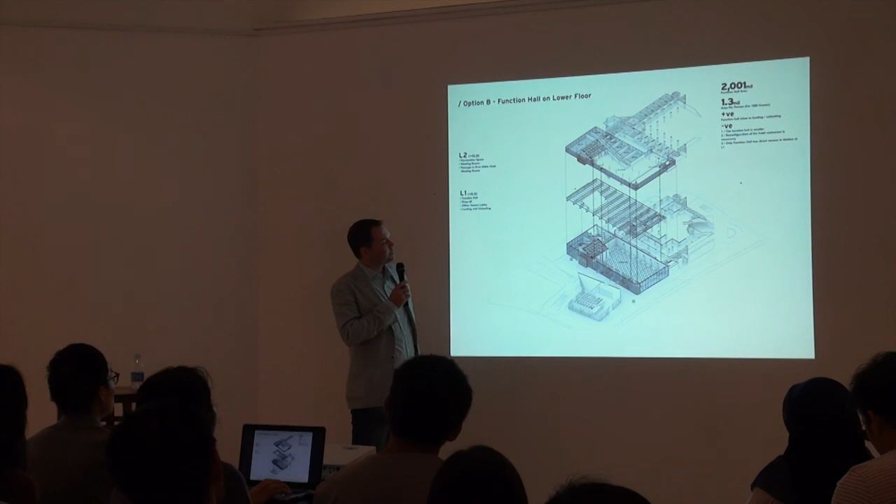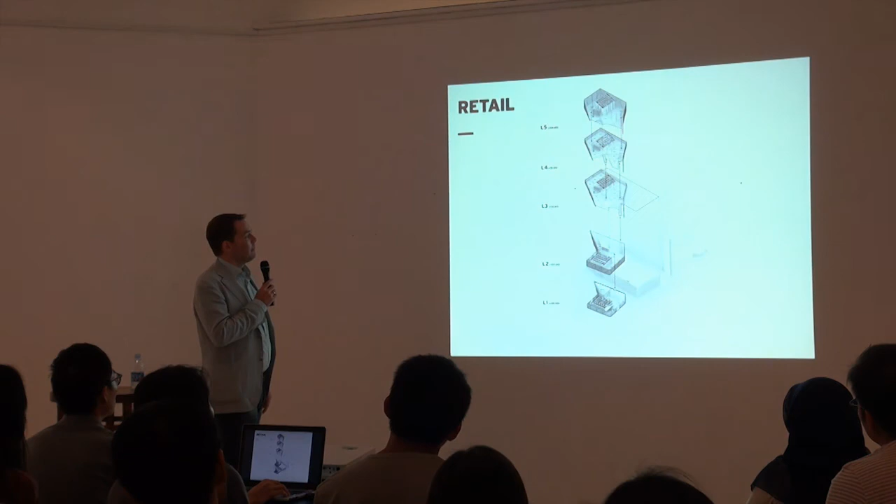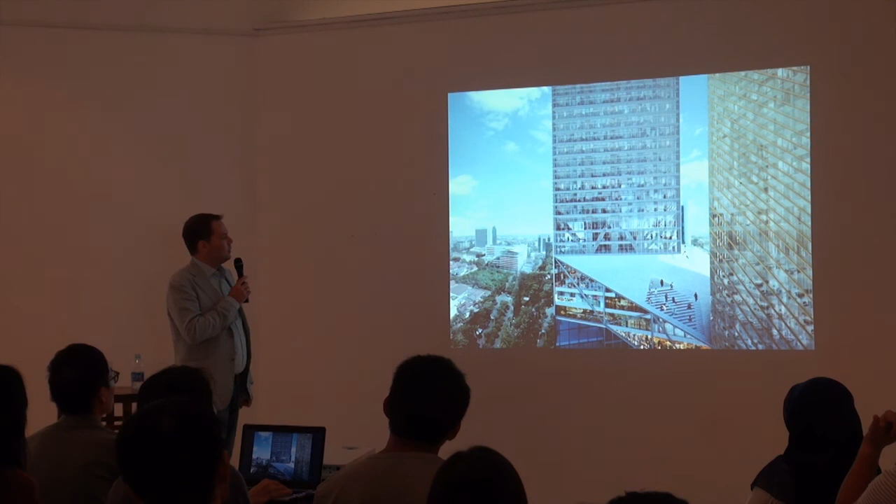Here the function hall itself. And here then a view of the shopping mall that stretches out over the function hall. The free plane so that you can cross the street. And then the retail that is giving this stair shape inside of the shopping mall. On the outside you can also come out. And then the two towers on top.

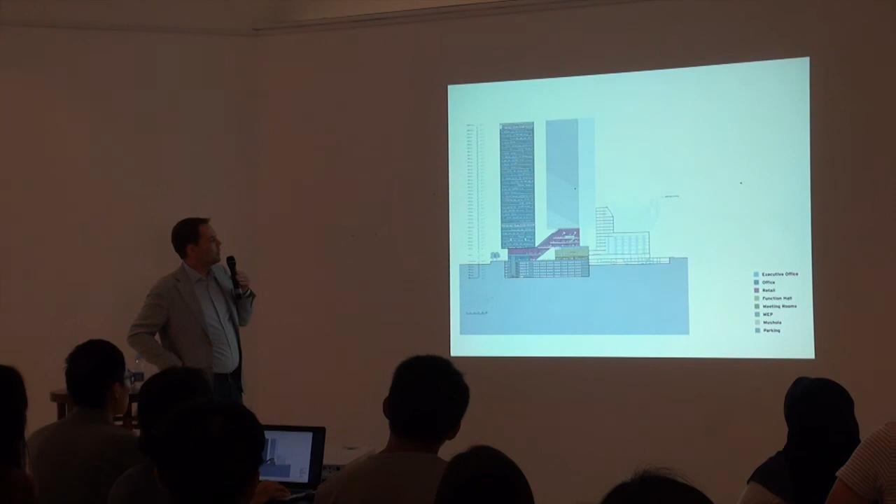I already explained that I wanted to have a bit more color. If it's gold or going to be silver is not the case, but we also wanted to express the facade in a different way than purely horizontal or purely vertical, which is normal. What we did is we made sure that we had sun diagrams, and these sun diagrams showed us that with the angle of the sun in Jakarta, it's never going to hit horizontal, it's never going to hit vertical, it's always going to hit under an angle. So a louver attached to the building under an angle is really capable of protecting the inside better.

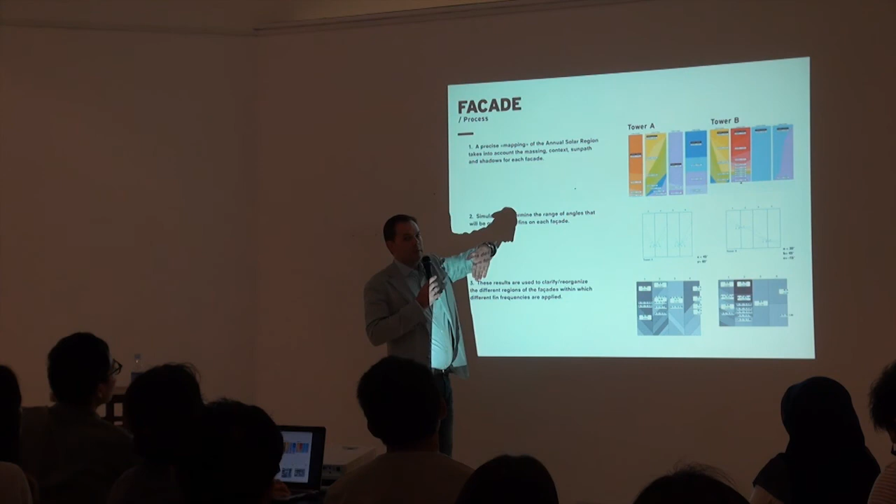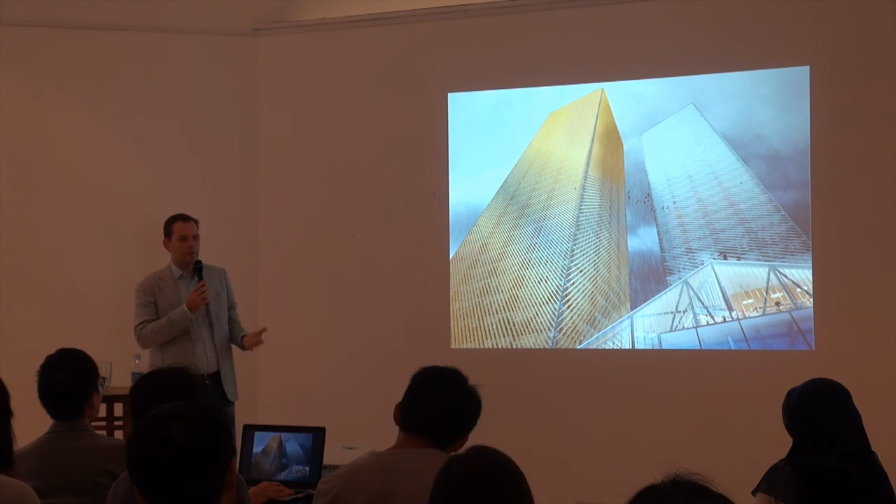So we used that sun diagram, made it a bit more rational, and every field of this diagram was filled with louvers that were under the diagonal needed from the sun diagram, and with the density needed for the amount of sun that hit the building. So you see in the overall atmosphere of the building that the density of the louvers changes by zones, and therefore the building itself is never one skin, while it looks as if it is always the same. Here you see it again, different zones of densities in the vertical dimension.

That was it. This building might never be built. That is the news that we received recently. But not because we are fired or that we had a great, crazy idea. The regulations in Jakarta are changing, and for this plot, that actually means there is going to be more freedom to plan something on this building. They're now asking us to look at a building or a vertical constellation of buildings that is much more vertical and therefore much higher. This was 160 meters, and they're asking us now to look at the possibility to enlarge it above 200 meters, so maybe even the highest possible in Jakarta. So we're looking at how we can keep some of these ideas, but also address more verticality because of the changing regulations of the city.